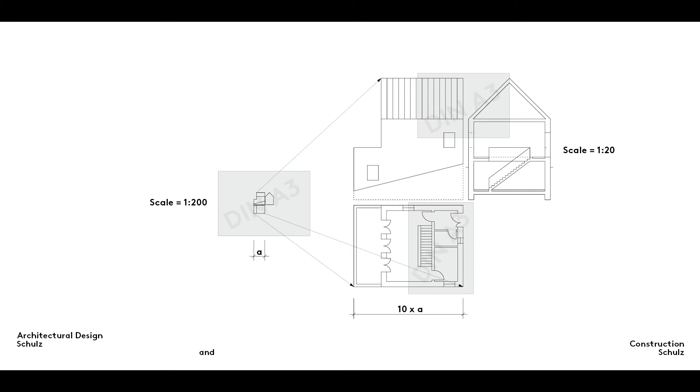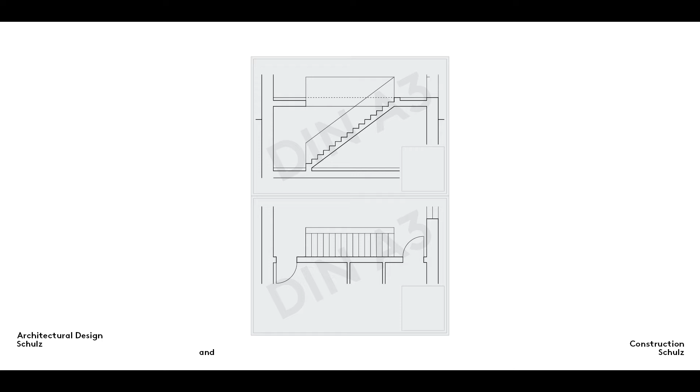This is how to solve the problem. Use 2 sheets of A3 paper. Draw the longitudinal section on one sheet and the plan view on the other. The added bonus of doing this is that you can also take advantage of the 2-view projection principle, that is to say, the vertical transfer of component edges from one drawing to the other, by laying the sheets of tracing paper alternately one on top of the other on your drawing board.

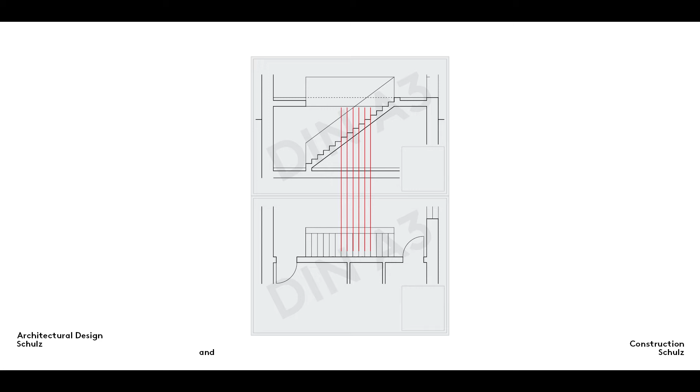This type of drawing is also best made on 2 sheets of A3 paper. To show the full height of your design, run your drawings on from one sheet to the next as if you were working on a single sheet of A2 paper. For the sake of completeness, I should also mention that this same method can be used to draw building interiors.

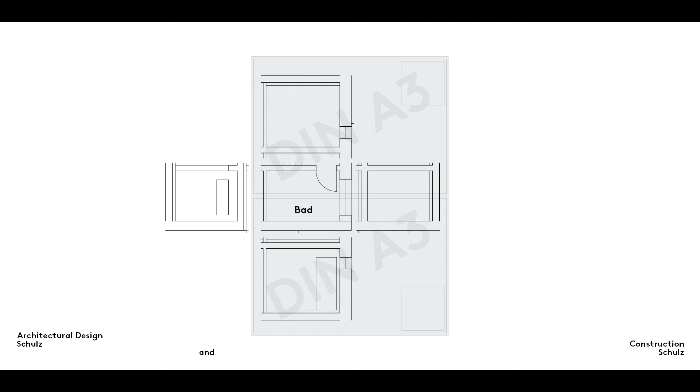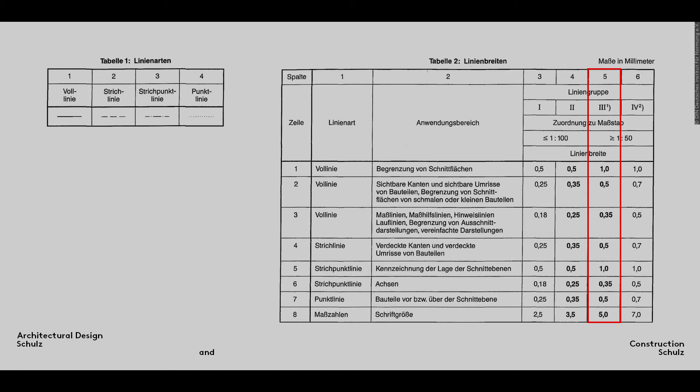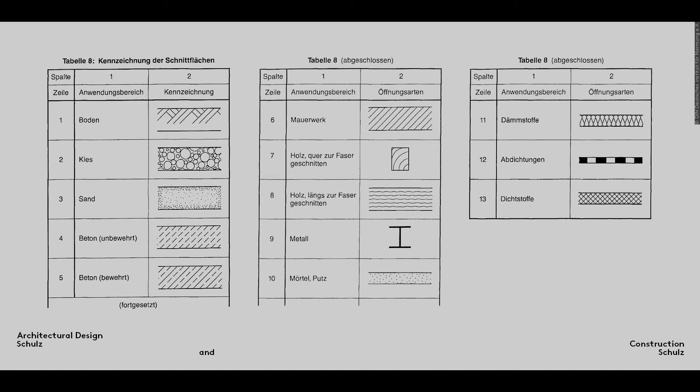If you watched our first series of films, you are already familiar with the line types and weights set out in German Standard DIN 1356-1. We recommend that you use line group 3 weights in 1:20 scale drawings, just as you would for 1:50 scale drawings. Because individual components are drawn larger, material hatching is used more frequently in 1:20 scale drawings. Here is a reminder of the hatching types defined in the table contained in DIN 1356-1.

Remember that 1:20 scale drawings must also include the cutting plane line, dimensions and labels. The cutting plane line is important because the 2 drawings will often be consulted in parallel, with the reader jumping back and forth between plan view and elevation. Dimensions are used more sparingly in 1:20 scale drawings because the construction dimensions have already been given in the 1:50 scale construction drawings, and a 1:20 scale drawing often simply provides an overview with references to other details. Labels are used to explain these references.

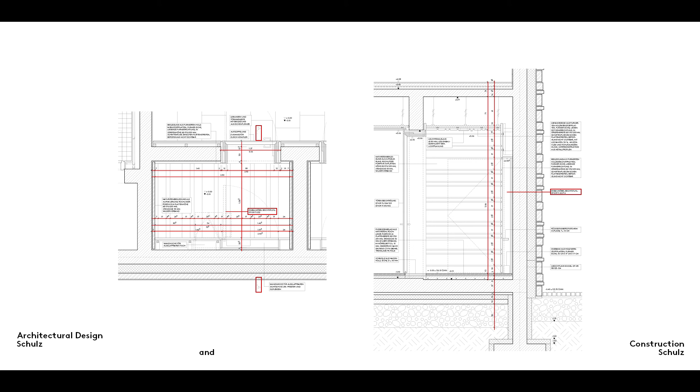Summary. Start by working out how big the finished 1:20 scale drawing will be and choosing the appropriate paper size. It's advisable to use the line types and weights specified in line group 3 in DIN 1356-1 in 1:20 scale drawings. This standard also sets out the different types of material hatching that can be used. These drawings must also include the cutting plane line, dimensions and labels.

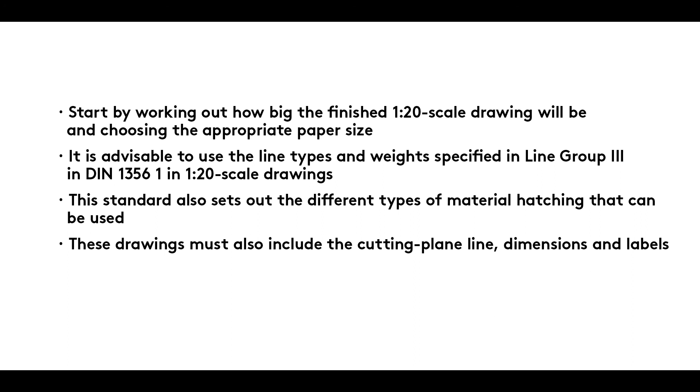Our Design Details series continues with film number 4, in which you will learn how to represent stairs in a 1:20 scale drawing.